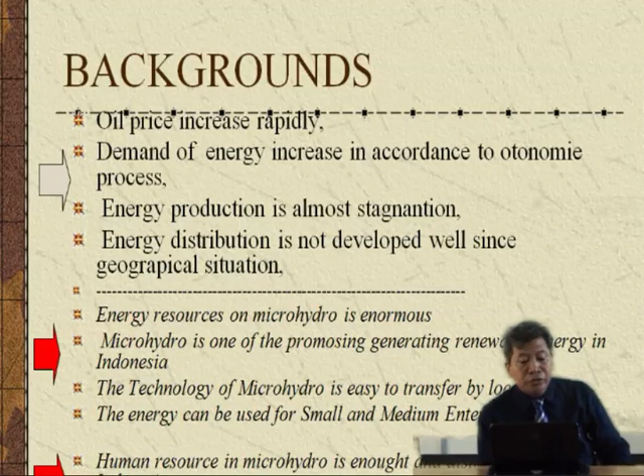On the other hand, we have an enormous microhydro potential in Indonesia's resources. If you go from here to the north, east, or west direction, you will find rivers, and you can also develop microhydro from that river. Or in Java, for example, you have a huge amount of irrigation channels, and you can just go through the irrigation channel - you can find a drop every 1 kilometer.

Technically, engineering-wise, you can solve it, you can build it. But the problem is not only how to build, but how to handle, how to manage after construction to get power and use the power for economic activity. This is the big problem right now. You learn about microhydro not only from the engineering side, but also from the social side, economical side, and environmental side.

So microhydro is one way of promoting generating renewable energy in Indonesia. Other lands understand this well. Germany understands that Indonesia has a huge amount of hydropower potential. Japan knows well about that. Australia knows well about that. They want to come to Indonesia to work with us to develop microhydro or hydropower plants.

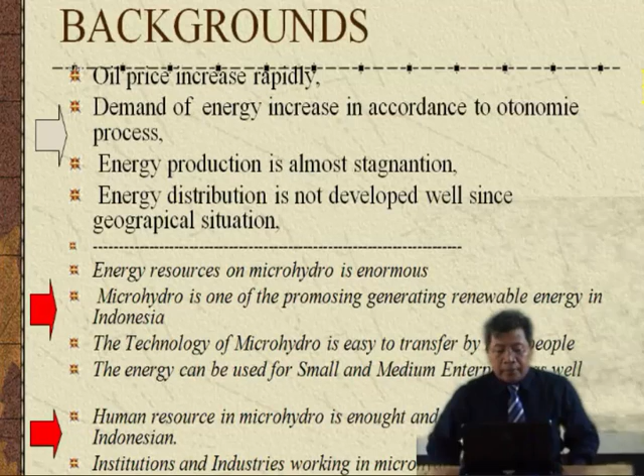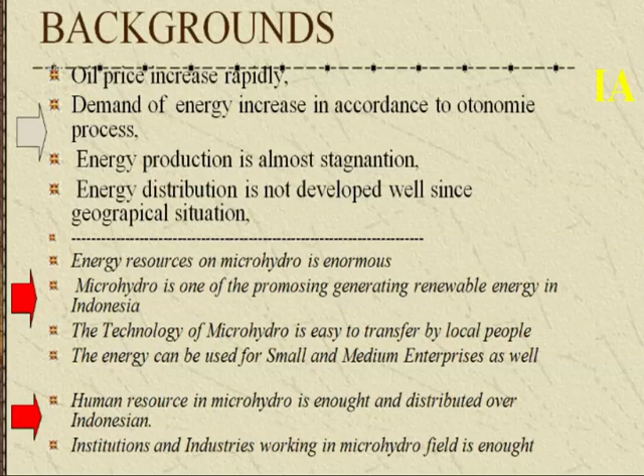Human resources in microhydro in Indonesia are enough and distributed over Indonesia. People who understand microhydro are already distributed, but you still have to learn. You are the new generation; the older ones will retire, and you are the new generation. That means microhydro can be distributed very fast to all islands in Indonesia.

Let's say in Irian Jaya in Papua, we already have more than 15 people who understand microhydro, our alumni. In Kupang, East Nusa Tenggara, we also have some people. In West Nusa Tenggara in Lombok, there are 10 people who understand about microhydro and small and medium enterprises too. In Java, a lot of people understand and have already built that. Also in Sumatra, Sulawesi, and Kalimantan.

But the problem is not how to build, I have said to you, but how to maintain, how to arrange, how to make microhydro automatically produce energy, and the energy will be used for activities.

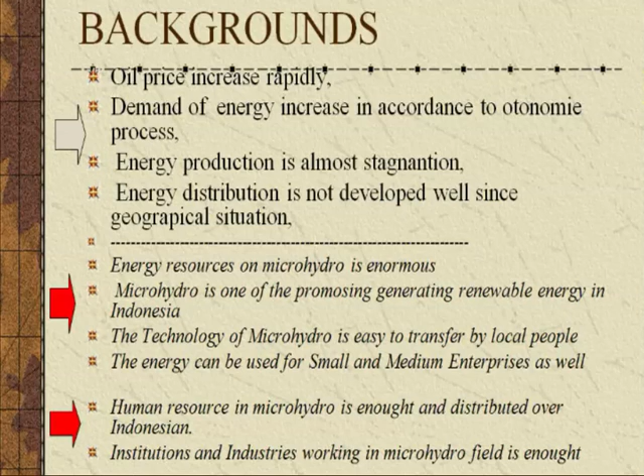Institutions and industries working in the microhydro field are enough also. Every district already has an institution which takes care of the development of microhydro, and we also have industry. Let's say in Medan we have 2-3 people who have industry for producing microhydro turbines, control units, and so on.

But compared to the Indonesian geography, even though the human resources are already distributed all over the islands, we need much more people who can build and maintain the microhydro.

Good. The concept of microhydro development is something like that. Microhydro or hydropower plants produce energy for electric supply, of course. But for what then? For village enterprise, first. So if you want to build microhydro, it's not just about building it and producing energy, and saying using the energy is not your business. No way. You have to make sure that the activity after microhydro construction is your work too.

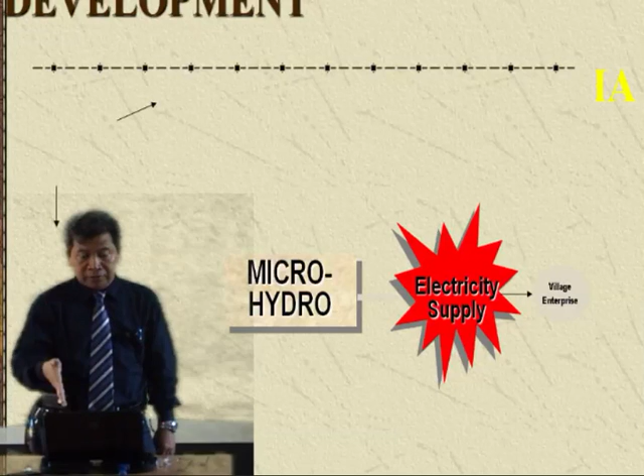Your work as a system engineering student is not only how to produce electricity, but how to use it until you produce something to sell and get money for income for the microhydro, because microhydro also needs maintenance, needs money for people who work on it, and needs money to build a new microhydro.

So the system is like a spiral: one microhydro in the beginning, in 2 years you'll have 2 microhydro, another 2 years you'll have 3, 4 microhydro and so on. So then you will have much more microhydro. This will happen if your microhydro produces electricity and the electricity is used for the village enterprise.

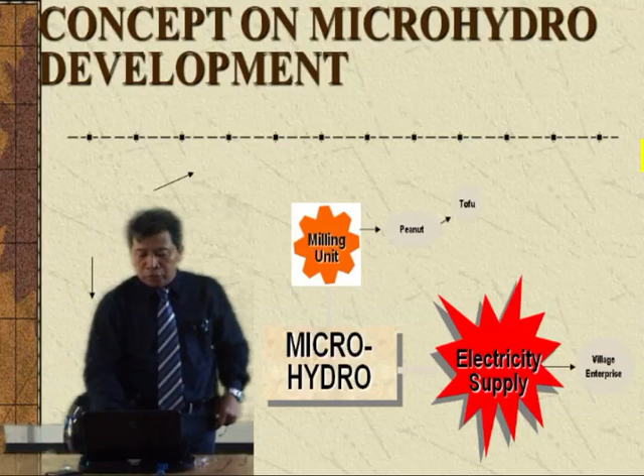I think I have already talked to you about that. You can use the energy for several purposes, like a milling unit for chocolate, rice, peanut, tofu, tempeh, and so on. Or for veterinary use, or other agriculture production, or you can use microhydro for a drying unit, for ginger, for coffee, for every purpose.

Another thing is for water supply. So if you have a water problem, drinking water, you can use the irrigation channel for microhydro, and couple the microhydro turbine with a pump, pumping water from a deep well to get water supply. Or you can also pump irrigation water from the low head to the high head.

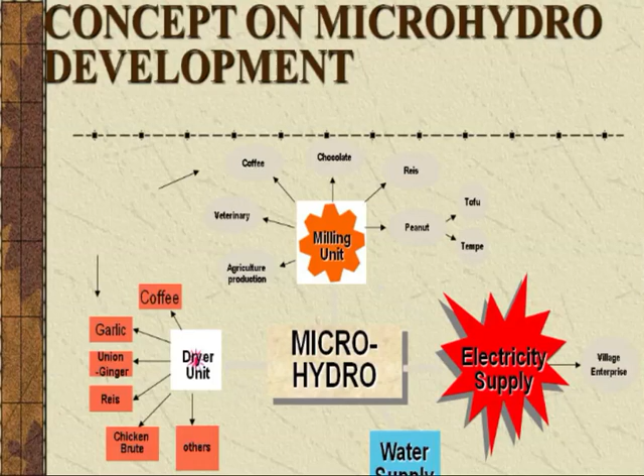Why is water supply important? Because with a pump, your microhydro energy is very effective, since you can use it 24 hours for pumping. But if you use it for lighting, milling units, and so on, it's okay too, but it's not effective because you have to turn it off, turn it on, repeatedly. The energy you're producing will sometimes be used, sometimes not used.

Water supply, irrigation pump can be used also, or garment village, all the activities. And what is very important to explain is about waste management here.

Our concept is actually a one loop concept. We have energy concentration, microhydro to produce energy. You should not only learn about small microhydro, but for starting you can learn that. Then the other concentration is small and medium enterprise around here. So you can also learn about small and medium enterprise.

And the other topic, concentration, is waste management there. The waste management is also for you because the whole small and medium enterprise produces waste, solid waste and wastewater. Then you have to learn how to handle the waste. So our system is actually already compact. We have energy, we have small enterprise, and we have also technology for waste management.

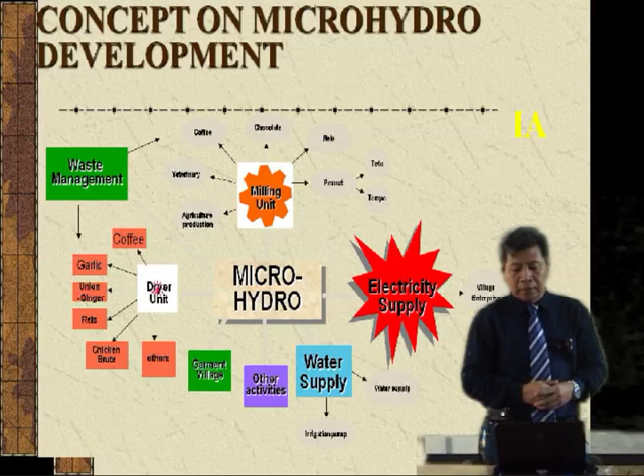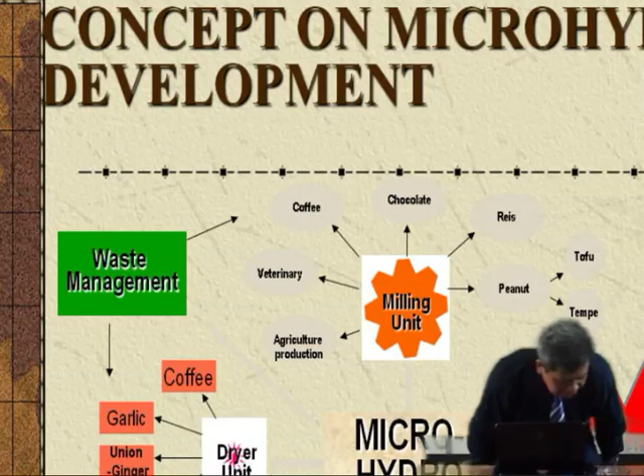But you have to learn by yourself also marketing and accounting, because you need that. It is a pity if you just build something and you cannot sell.

It's not systemic thinking. If you build something, you have to sell. Don't say let somebody else sell it. No, maybe somebody else doesn't want to sell your product. Or minimum, you have to find people who can sell your product and you get money from them. You should not sell by yourself, but you have a system for selling the energy. Okay?

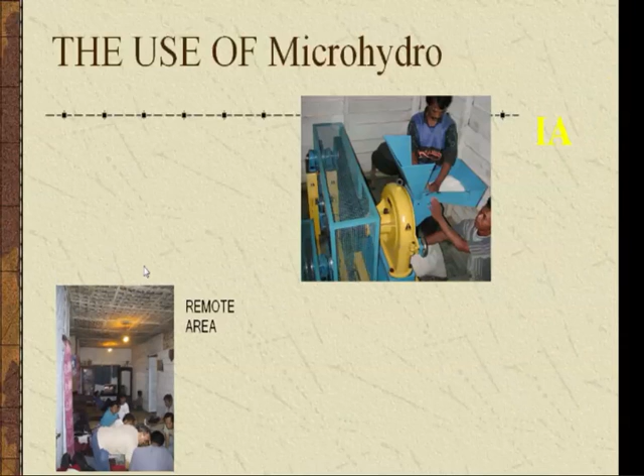The use of microhydro electric energy can be of several types. For example, here in a very remote area for lighting, or this is the microhydro, and this is the turbine, coupled directly with the rice mill, then you can produce a rice mill.

The renewable energy development based on community is for increasing the living standard. This is the concept. One thing you have to learn also is how to realize the concept, not only the concept itself. The concept is nice, but how to realize the concept is one very important thing.

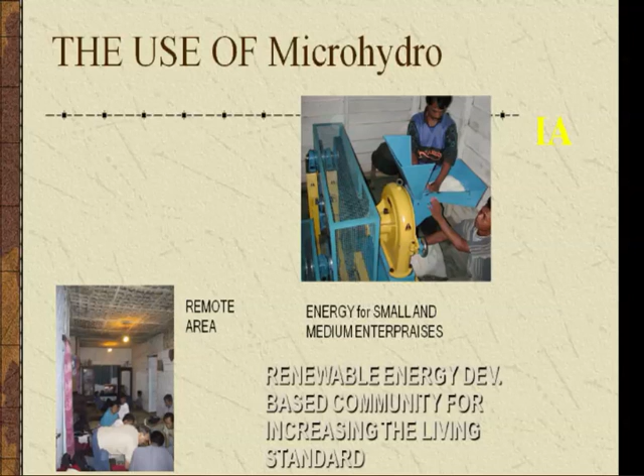This is systemic thinking, a combination between the thinking world and the living world, how to plan and how to implement. You should not be satisfied with information that you already have, that you have already learned. It is not systemic thinking. You have to be satisfied if you have already learned and already done. I have learned, I have done, and I have knowledge. Learning, you get information.

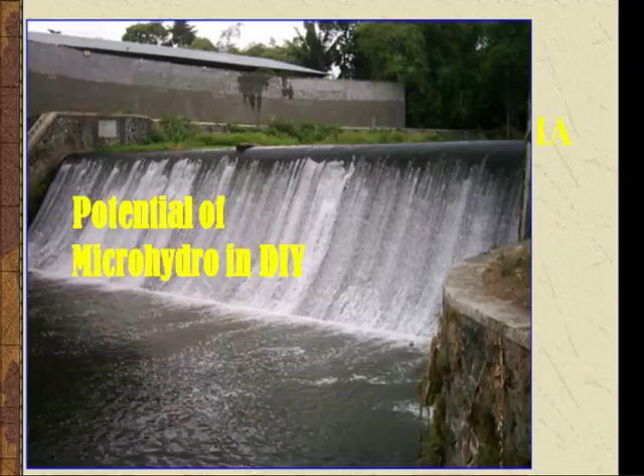Good, the other potential, for example, we have a lot of weir. This is a weir. Weir in Indonesia, in Bahasa Indonesia, is bendung. And dam is bendungan. Weir is bendung, something like that. You can see here, you still have water.

3 cubic meters per second, for example, a very wide river. You even have to think about the environment also, like you have to fulfill here with a fish way, so the fish can also swim up and down. So even with a weir, you still have ecosystem, fish ecosystem, with the fish way.

But this is also potential microhydro that you can produce. For example, here 5 meters or 4 meters, with 3 cubic meters per second. Then 5 times 3 is 15, you can produce about 75 kilowatts.

We are not talking about megawatts. Megawatt is a huge amount, a huge scale of microhydro, and for the student it's just a dream. But under 100 kilowatts, for the student, it is not a dream. This is reality. You can produce, you can work with it.

Don't always think about the big thing, 2 mega, 3 mega, 6 megawatts, but you cannot do that. You can start with 10 kilowatts, 5 kilowatts, but you can do it by yourself, and the people can understand. And then by the time you increase your ability from 10 kilowatts to 20 kilowatts, I can handle 20 kilowatts, I can build, I can also handle, I can use the energy. It's nice, for example, something like that.

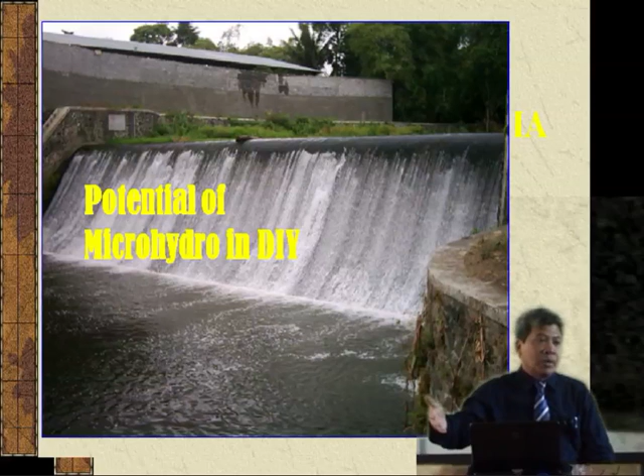So we have to start from small things. Of course, you can also, as a member of a group, develop 1 megawatt, no problem. But if you want to develop by yourself, you can say, okay, I can make 10 kilowatts. It is my business, I can do it by myself.

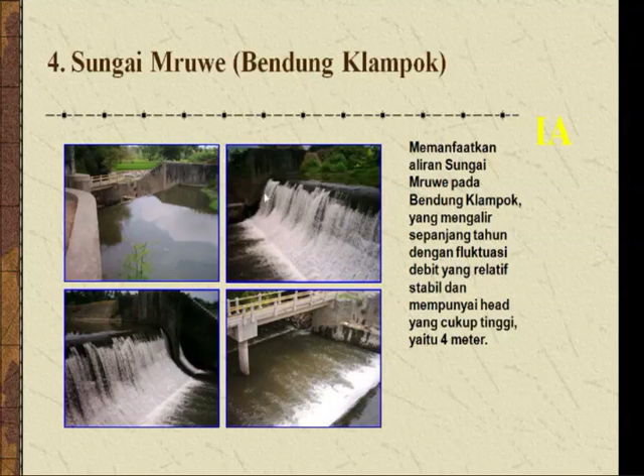This water is very clear, and you can use just an open intake and let the water flow to the intake, and then you can get energy, producing energy.

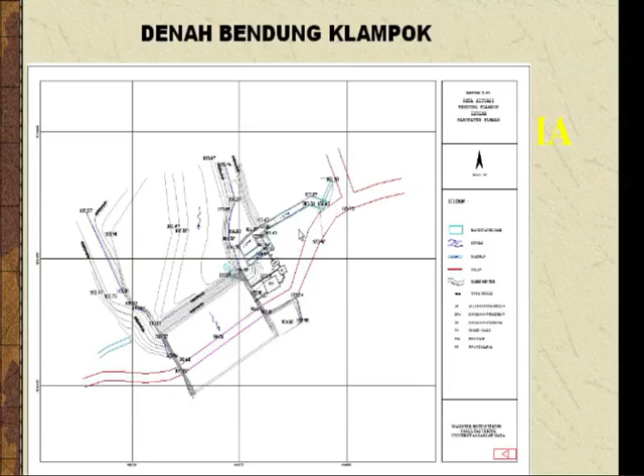But yeah, this is the river flowing down here, and here the weir. Look at this, we can open here and make it microhydro here, and the river can be closed again back here, and you have produced microhydro there, like this.

You can see here, you can also make here much bigger intakes, and you let the water flow here, and you give it back here. In here, you can build microhydro. So like this here, this is a...

sediment trap channel, and then here the turbine, and then here you have a channel going to the turbine. The turbine will be running because the head here and here is different.

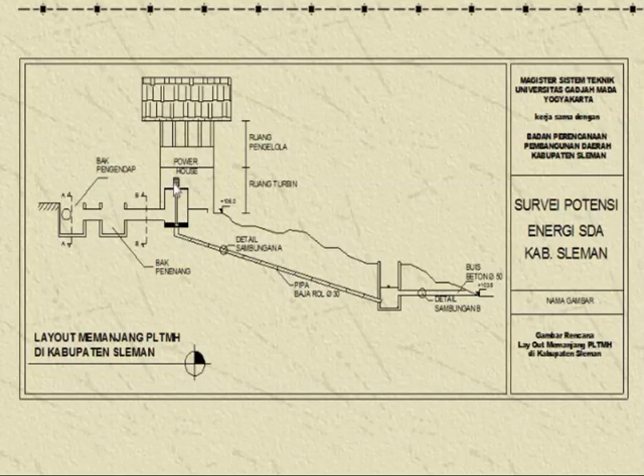The head difference can be, for example, 10 meters or 6 meters. So the turbine here will run because of the head, and then here you have a generator. The generator will also run, and then you have electricity. It's very simple. The water comes down here because of the water head, the turbine propeller is running, or was run, and then the generator produces electricity. This is a simple concept of microhydro.

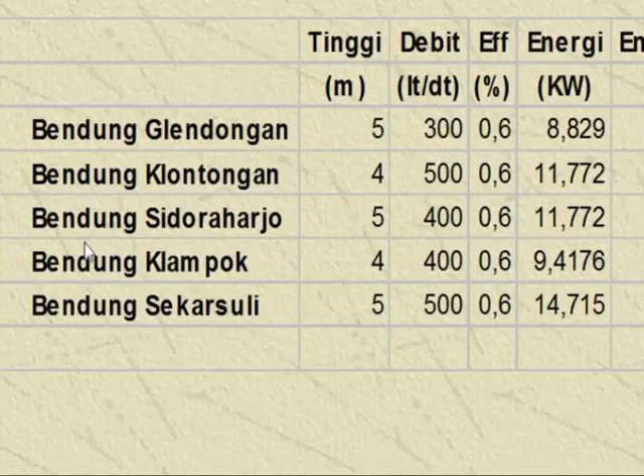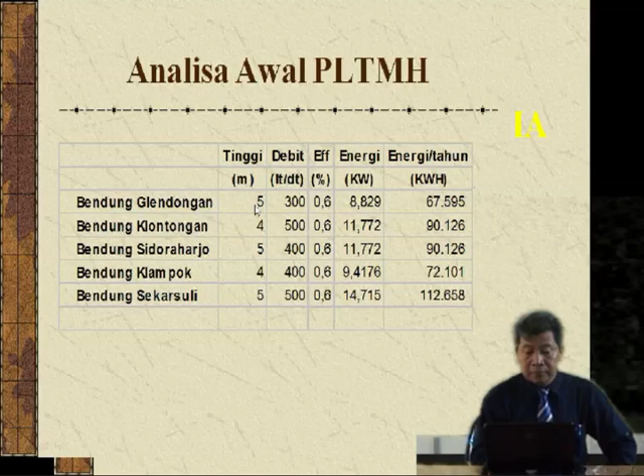That way, this is also easy to develop. And here in several places we have a lot of potential, like for example here in Glendongan, they had a 5 meter head. The discharge is 300 liters per second, a small discharge.

Effective efficiency we have only 0.6. We can increase it to 0.75, but normally 0.6 is already good. And we have energy of 8 kilowatts only.

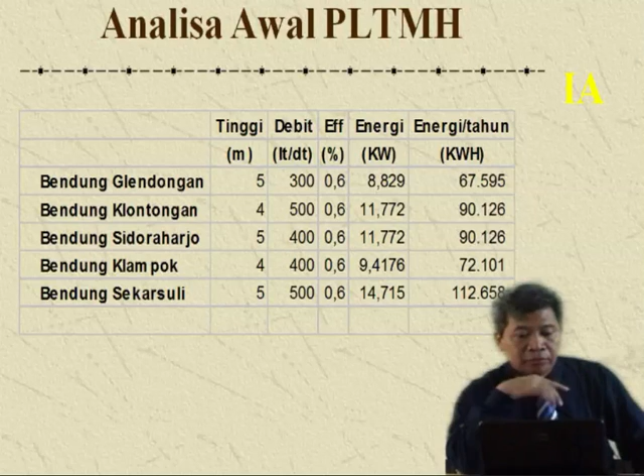So you can use it for small and medium enterprises with each kilowatt. And here, Sekarsuli, you have 14 kilowatts. Of course, you can also produce 1 megawatt, but maybe that's not your scale. 10 kilowatts, 15 kilowatts is your scale.

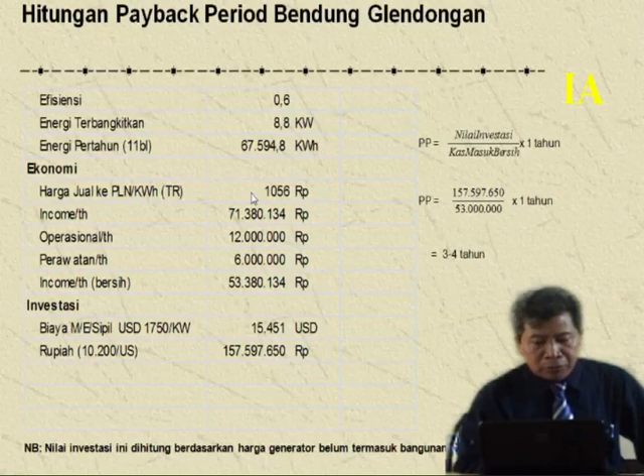Good, if we want to calculate, this is not too difficult. We have 0.6 efficiency. We have 8.8 kilowatts of energy producing, and 11 months, because 1 month is for overhaul and maintenance, you have 67.5 kilowatt hours... 1000 kilowatt hours, and we have now 1056 rupiahs per kilowatt hour. Income per year you have 71 million rupiahs already.

For operational, you need one person to operate, about 1 million times 12, where you have to spend 12 million. And then for maintenance, you have about 6 million. You have income per year of 53 million rupiahs, if you sell that energy to PLN.

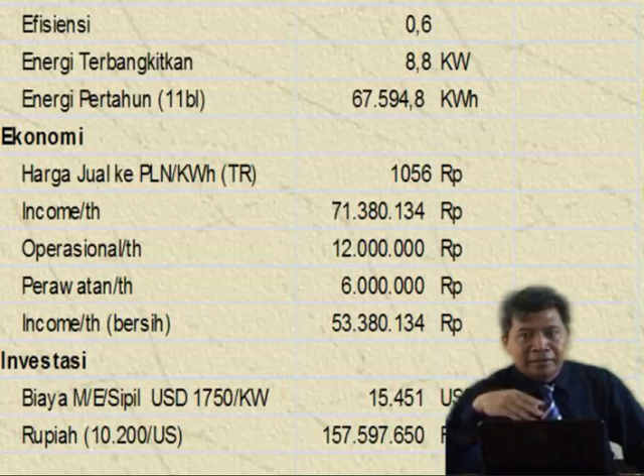Of course, the problem is how to sell it. PLN would like to have a good quality of energy. What is good quality? Good quality is the frequency 50 Hz, for example, with 220 volt, for example. Regular, that means PLN doesn't want to have energy for 1 hour and then no production the other hours. So we have to convince them that our energy production is stable, good quality, then we can sell to PLN.

Selling to PLN, if you can sell to PLN, is the best. You should not think of anything else, you just sell to PLN and you get money. And how about the money? The money is yours. If the community around the PLTMH is also included in the project, you have to share with the community.

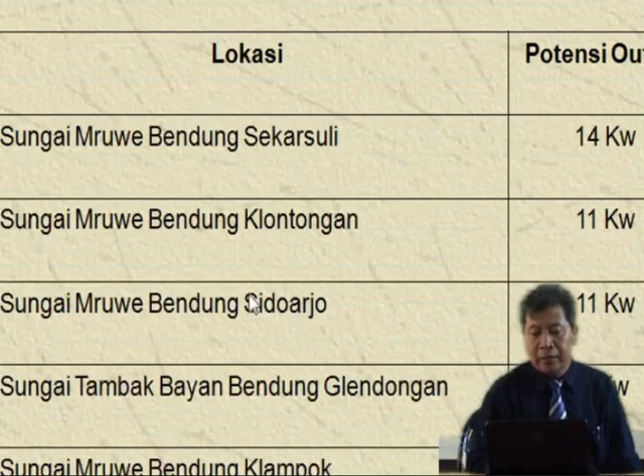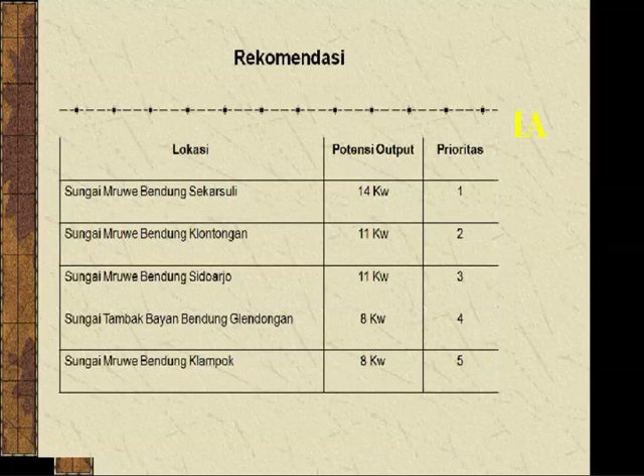For example, the 11 kilowatt is already near to the community. The community is ready to share. The community needs the electricity, maybe even at 8 kilowatts. This is the priority, very high, for example 15 or even 100 kilowatts, but if the community doesn't need that...

and nobody cares about that, it's far away from the community, it's too dangerous and so on, this is not the priority. Priority will be recommended if engineering is possible, social is also possible, economic is also possible, and environment is possible.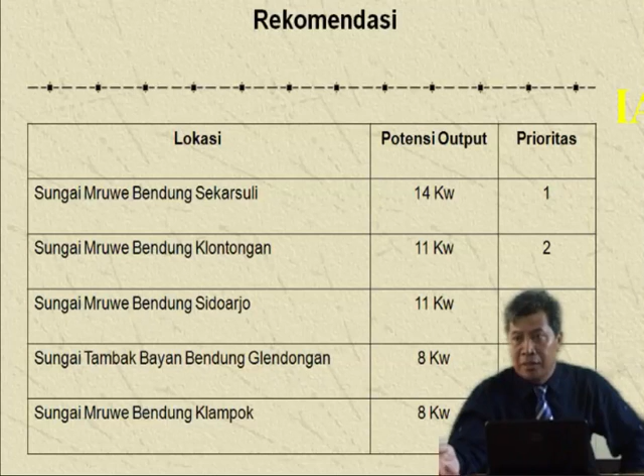In engineering, it must be possible, social, adaptable - people understand and can do that. Economic, accountable and feasible, and environmentally sustainable. Not that the water comes only this year - next year we don't know whether the water flows or not.

I can show you another potential in another place, in Semawung. Some of you may have already seen this potential. This is a huge amount of potential in Semawung. This is the irrigation channel - you see, this without water, this with water. The head difference is 10 meters. You have to visit there. I will give you a task to visit so you understand. Huge amount of water. Semawung is in Kulon Progo, not far from here, only 1 hour using motorcycle, then you can find that.

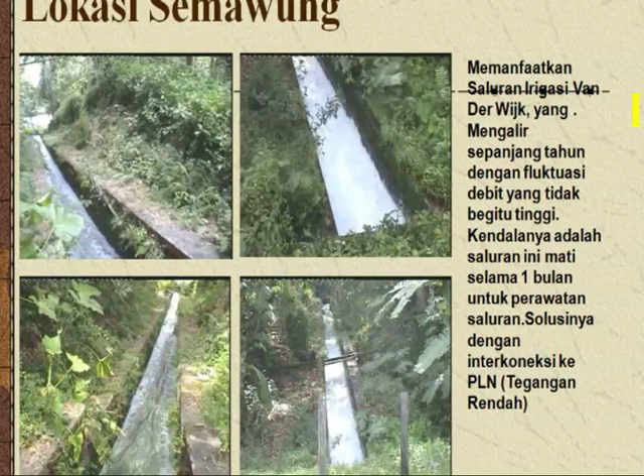About 10 meters head, and the discharge about 5-6 cubic meters per second. A huge amount of potential. Of course, it's not up to 1 megawatt.

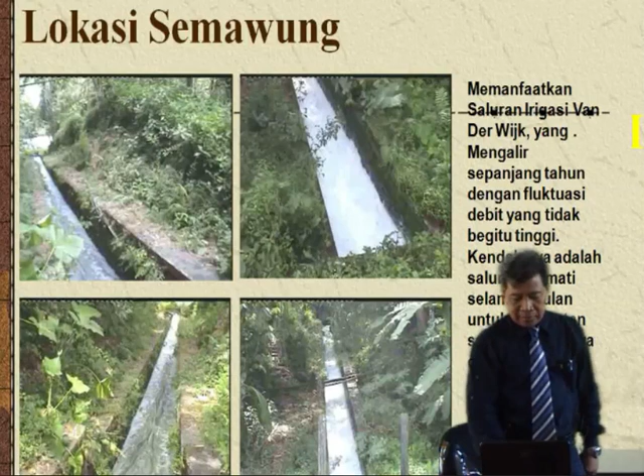Another location in Kedungrong. Look, these two potentials, Kedungrong 1 and the other Kedungrong, are huge amounts. The discharge is about 3 cubic meters per second, the head about 5 meters. You can imagine a huge amount.

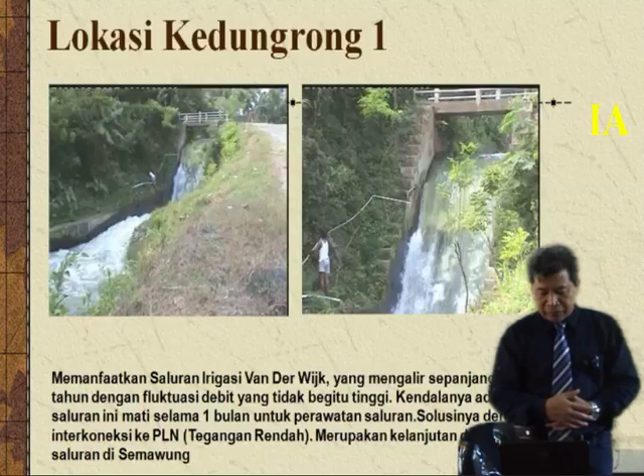Let's say we try to see - the head is about 6 meters, discharge about 3 cubic meters per second or 3,000 liters per second. The energy is about 90 kilowatts.

And every year we have only calculated 11 months, so we have about 689,000 kilowatt hours, say 1,000 kilowatt hours. If you want to sell to PLN at 1,056 rupiah per kilowatt hour, your income per year is 727 million rupiah per year.

And this irrigation channel, this potential, has already been unused for 50 years. That means you've lost 727 million rupiah times 50 years already. You can imagine.

For operation, you can use one person, plus maintenance of 6 million. Then you have about 700 million rupiah per year. In the village, that's a huge amount of money. Maybe in New York it's not too much, but in a small village you can imagine. If you can sell it and give the money to the people to develop their economic activity, you can imagine it's a very huge amount.

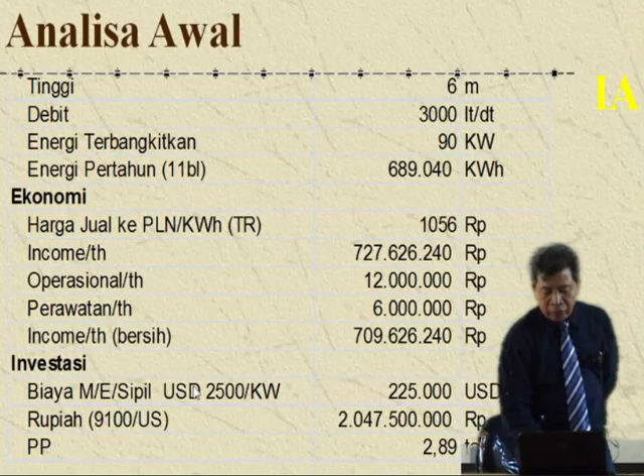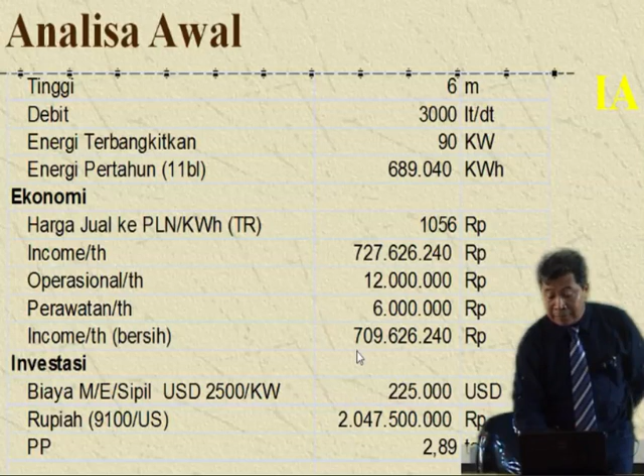And if now 1 US dollar is 9,100 rupiah, you have to have 2 billion rupiah. So if you spend 2 billion rupiah, and you already have 709 million rupiah, your money will come back in 2.89 years, or 3 years. In 3 years your money comes back, and the other 22 years it's your money, or the money of the district region.

Of course, from the calculation it's easy, but how to implement is another question. You cannot say, 'oh, we can invite people from outside, from Germany or Japan or another country to come here to develop that.' If you do that, it means forever you cannot. You have to say, we have to do it by ourselves, with our hands, because we have a kind of responsibility to deliver our knowledge to the young generation. The knowledge can be delivered if we can do it. If we cannot do it, we cannot deliver it.

Information is not knowledge. Knowledge is information, time, experience, and attitude. If you have the attitude to deliver knowledge to the new generation, that means you have knowledge. If you have no attitude to deliver your knowledge, that means you have no knowledge, only information.

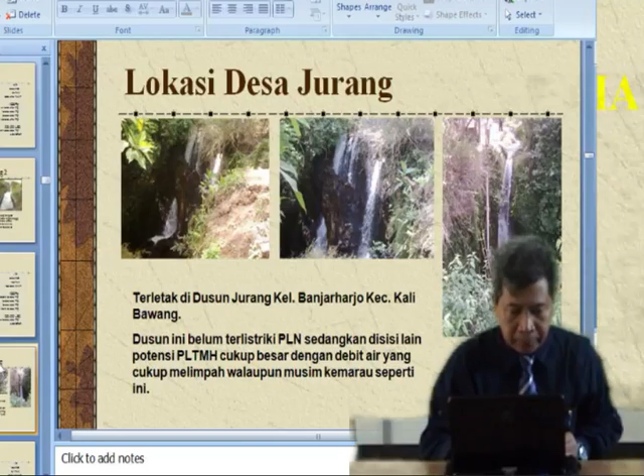So with this, in 2.8 years, only 3 years, you can pay back the money from the bank or from other resources. If the money is from government, you cannot just say 'oh, the money is from government, we build and finish.' No, you have to think about it, even if the money is from government, spending on the people - you have all these things. In 3 years we have to collect the money back. Same with our capital, the money can be used for development again.

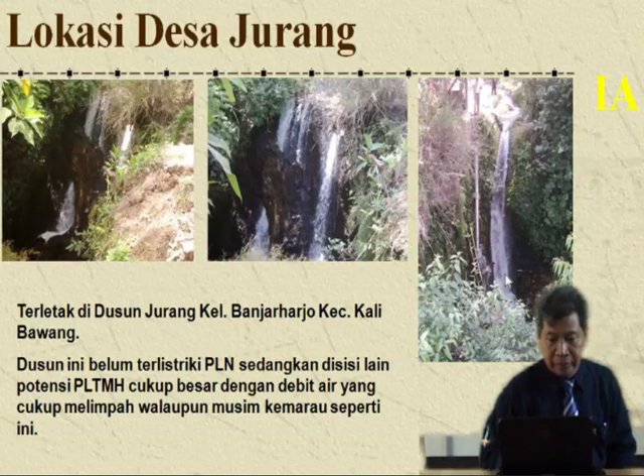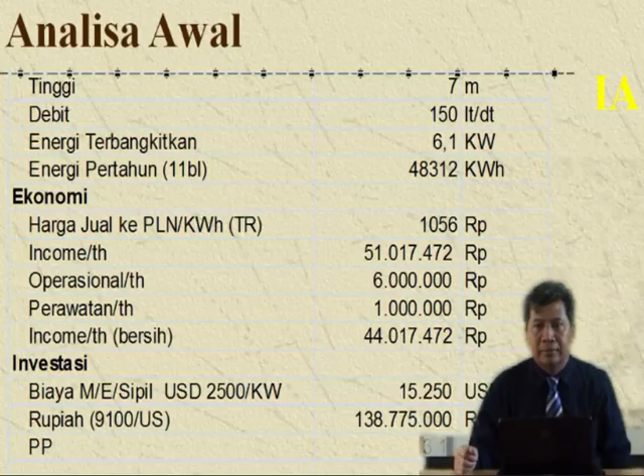If the oil price always increases, that means microhydro energy becomes better and better. How about in a very arid area, for example here in Gunung Kidul?

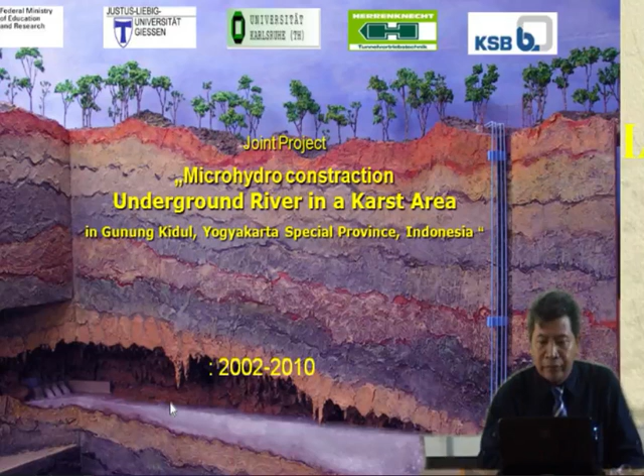In Gunung Kidul we also have potential underground rivers. Have you ever seen an underground river? Not yet? You have to see it. I will give you a task to go down, give you a sign, and you will see what kind it is. This project was created by the district government, German Karlsruhe University, and other fields, BATAN, and also Gajah Mada University and MST, I'm involved there. This project is called Microhydro Construction in Underground River in a Karst Area, Gunung Kidul, Yogyakarta Special Region, Indonesia.

This is the underground river, about 100 meters under the earth's surface. This is the earth surface where you cannot find water. Every rainfall comes down here and flows down. Here you see stalactites and stalagmites - this is stalactite, and down here stalagmite, and underground here you have water. The water collects here and flows down.

And here we build a barrage, or we stop the water there. The water in here is a river, pipe river like that, underground. In a very small area we build a barrage, and then the water cannot flow down because of the barrage. The water will increase, and we have a head difference. The head difference is about 15 meters. More than 15 we don't want, because the structure of the karst area is very porous. If you put the head difference more than 15, we don't know whether the karst area can hold the water or not.

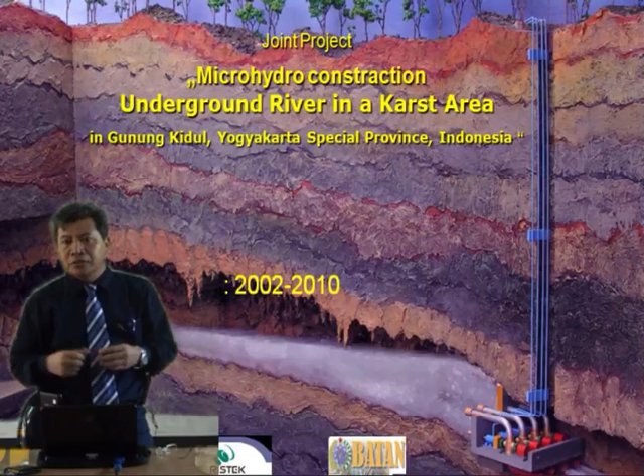So this is the thing that you understand well - between theory and practice is quite different. You have to understand that. What I want from you is that you not only stay in the theoretical thing. Theoretical things are easy - you can learn in one night and understand. But practical, you have to go down to the real situation and work on it. Then you have information from books or from lectures, and you have also the opportunity to work on them. So you combine theory, information, and practical experience, and then you have knowledge.

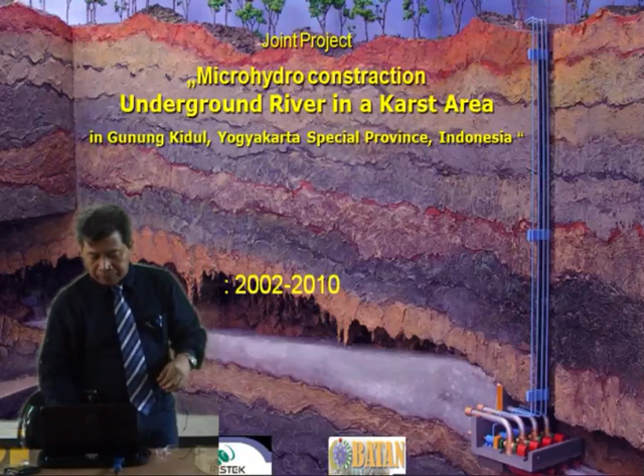So this is the Bribin, Purwosari, Kabupaten Gunung Kidul. Head is 15 meters. Discharge is 1,000 to 2,000 liters per second, or 1 to 2 cubic meters per second. If you calculate, we have only 350 kilowatt. And if we can pump the water 80 liters per second, with a height of 250 meters, from the river underground, you pump 100 meter plus 100 meter plus 50 meters, and from that you can distribute to the people who need water.

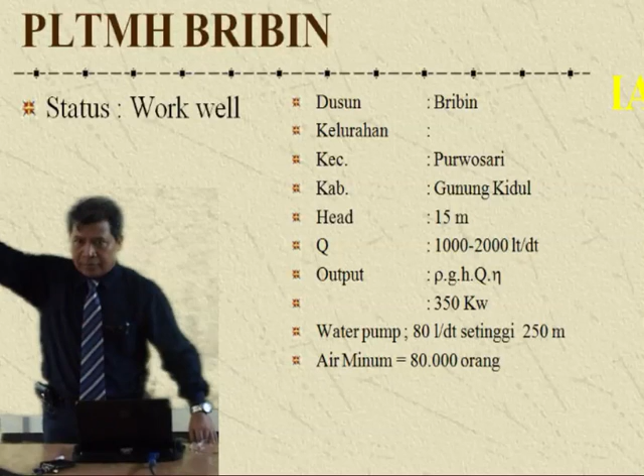If you do that with a class, you can imagine how many pahala (reward) you will get. You will get a lot of pahala, and you will fly to heaven with us together. But not now, because we have to do something.

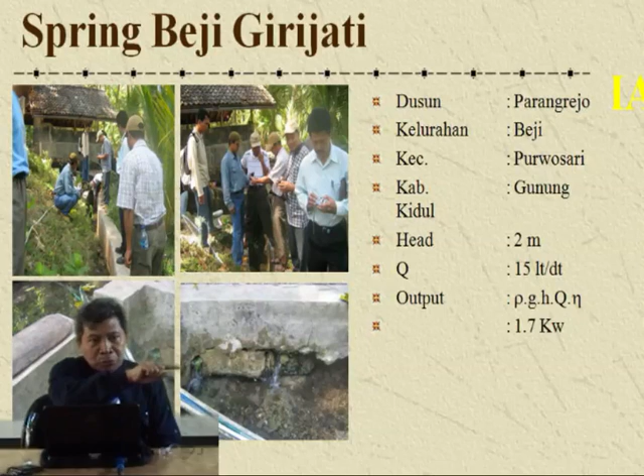Even if you have only a very small spring, if you go to the hilly area, sometimes you find a very small spring there. You can trace the small spring, go down and down. You can measure with a theodolite or just a water pass, and then you can find the head difference. You can make a pipe there and build a micro plant. Maybe you can get only 1 kilowatt, but no problem. 1 kilowatt is already enough for about 20 bulbs, 20 bulbs with 50 watts each, which you can divide into 5 small bulbs, enough for about 20 households. So don't worry about that.

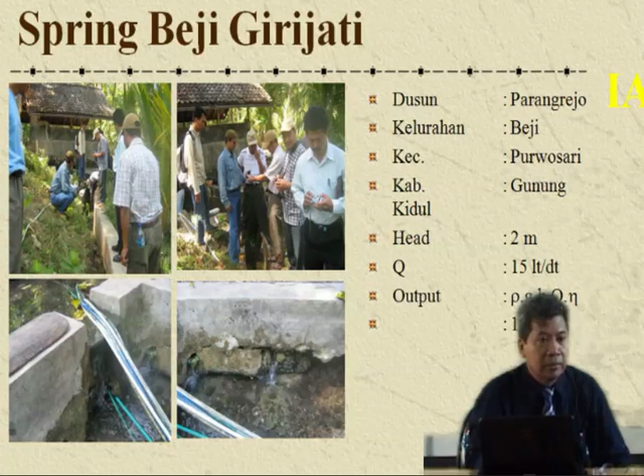Look at this here. Head only 2 meters, 15 liters per second, you have 1.7 kilowatt here. So here 10 meters head, this is a very small amount of water, but the head is 10 meters, only 10 liters per second, you have 1.8 kilowatt, and 1.8 is usable 24 hours.

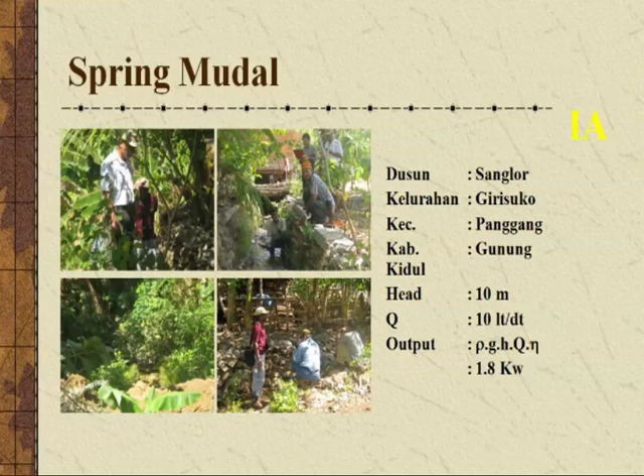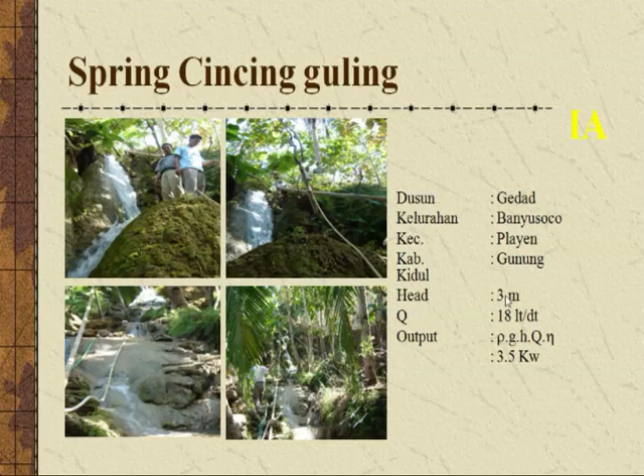Here 3 meters, we have 3.5 kilowatt. Not 3, 30 - I think it's 30. 3.5 kilowatt. This is also 30, that was 30, and this is also 30, then you have also 3.

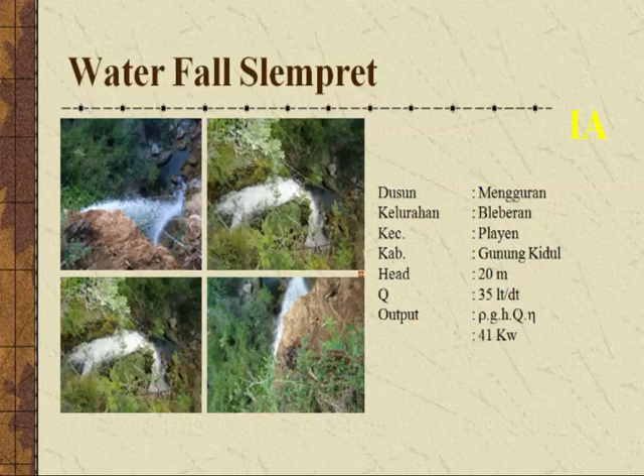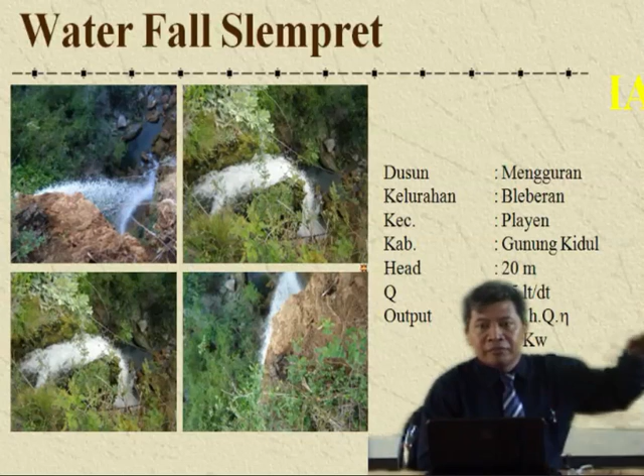So here we have a waterfall in Bleberan, Playen, Gunung Kidul. We have 20 meters, but the discharge is only 35 liters per second, just a very small creek. But the head is 20 meters. This is nice because it is cheaper than if you have 1 cubic meter discharge but only 1-2 meter water head - you need a big turbine. But if you have a very high head difference and very small discharge, you only need, for example, only a 20 centimeter turbine like here, but they can produce the same energy as a very big one. So the higher the difference, the better for microhydro, the cheaper. The less head difference, the more expensive.

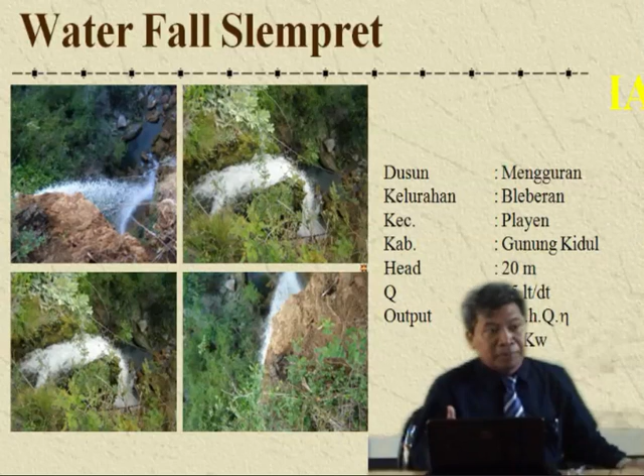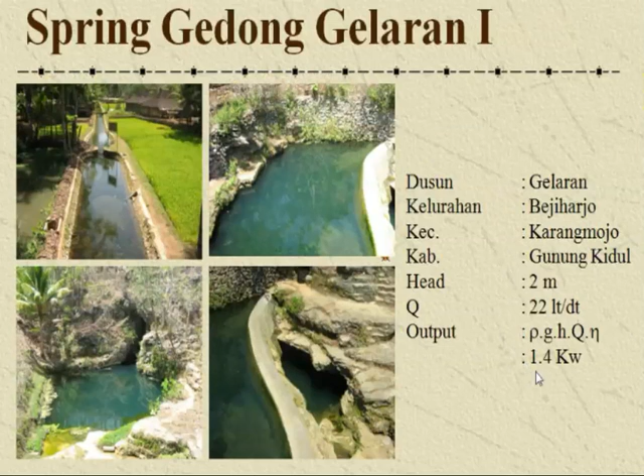We already implemented this. I will show you the implementation of microhydro. Maybe my lecture will finish in 10 minutes. For example, a project in Minggir, Sleman DI, discharge intake is 0.85 cubic meters per second, or 850 liters per second, and the head is only 2 meters. The output we have is 10 kilowatt.

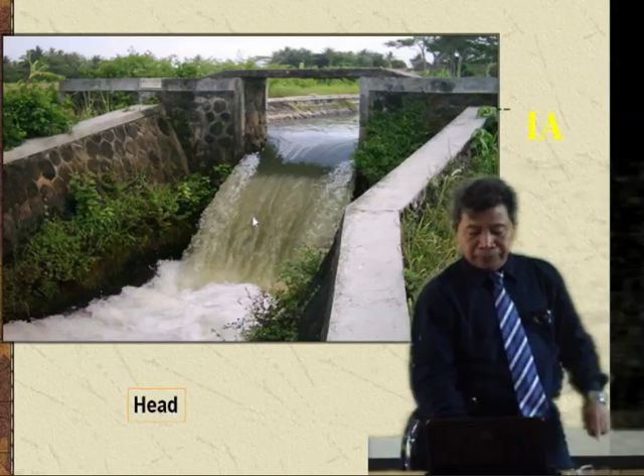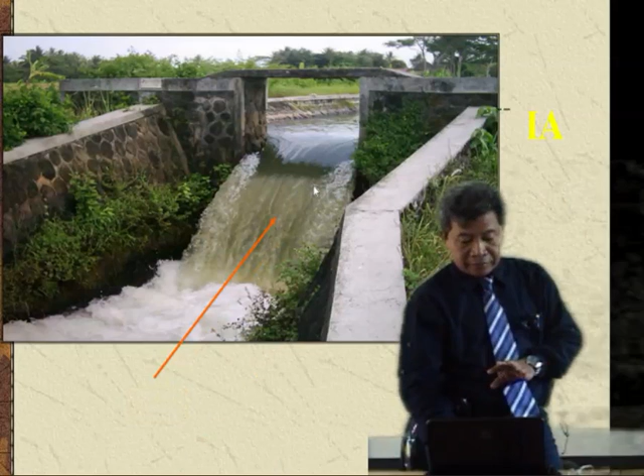Look at this here - this is the irrigation channel in Minggir. So we have a place here for building the microhydro. The powerhouse is here, and this is the channel going down. This is upstream, this is downstream. It's already about 40 years this irrigation channel has not been used for electric energy. The head difference here is about 2 meters. So then we try to build a powerhouse there.

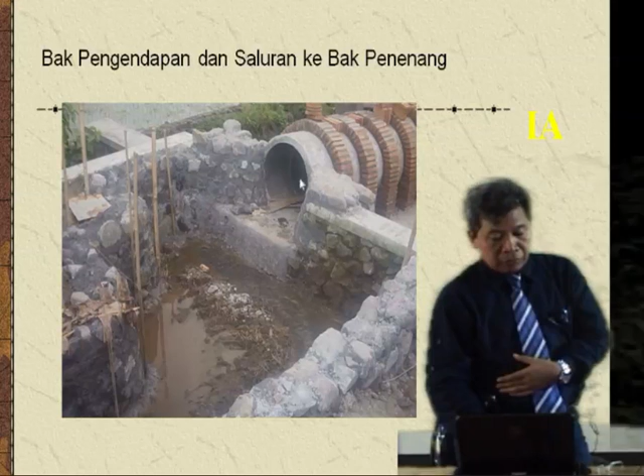Here is part of the powerhouse, rumah Pembangkit. This is the irrigation channel, this is the release chamber, release channel. Again, here we can say this is the sediment trap area before we go to the channel. Here the channel is not a penstock but a channel, flowing to the turbine.

This is the irrigation here. We make the powerhouse here - this is the channel going to the powerhouse, and the turbine will be here, and the water flows again to the irrigation channel. So the water should not flow outside from the irrigation channel. You have to bring the water back to the irrigation channel, otherwise the farmers will be angry with you, because they need water. You just take the energy, not the water. The volume of the water should be the same before and after the microhydro. So here is the chamber for the turbine, and this is the release water channel going to the irrigation channel.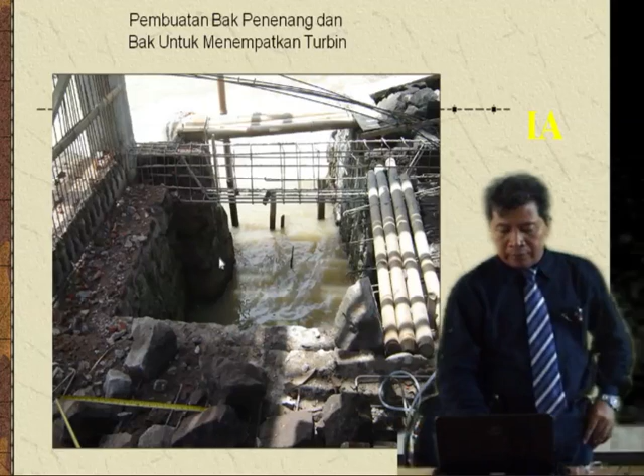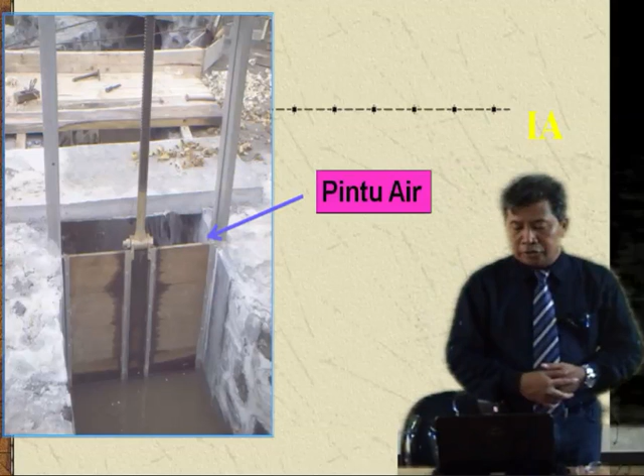Here is the intake from the irrigation channel to the sediment trap chamber, going to the forebay in there. This is the gate. You can arrange how much water, how many cubic meters you want to release. This is water from the irrigation channel going down to the sediment trap, then coming to the forebay channel.

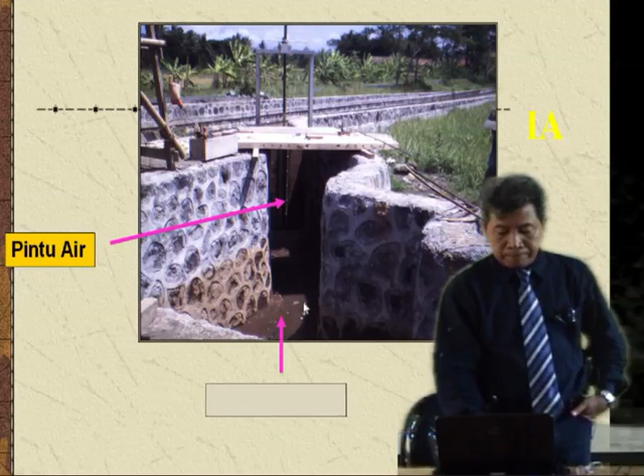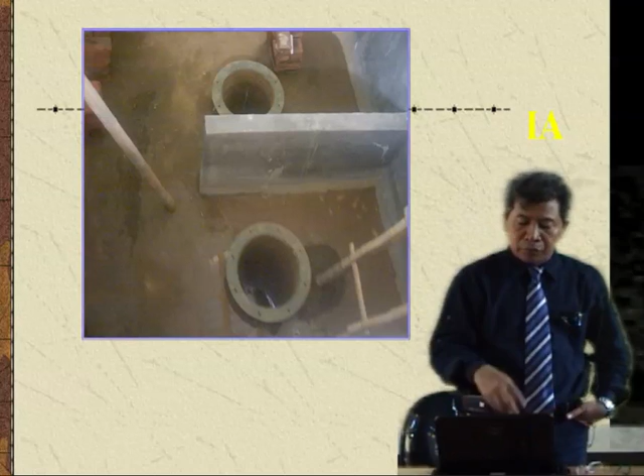Gate again. This is the channel coming down there. It's not banked out, but this is the forebay. This is the turbine holes. You will pull the turbine on the hole there, so the water flows to the hole and comes down to the irrigation channel.

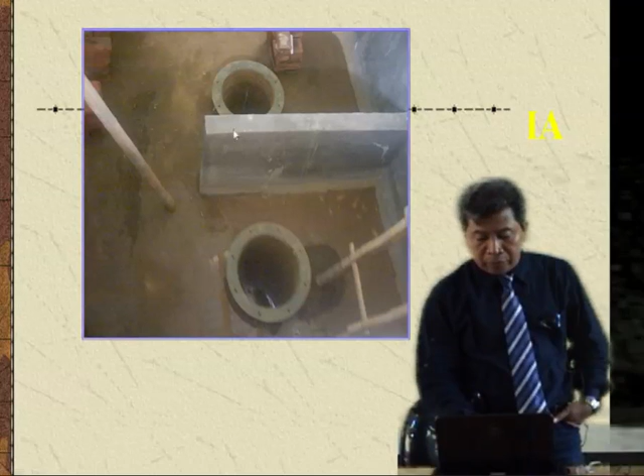So you use an open flume turbine here. The open flume will run two open flume turbines, and we couple the energy into one generator. The generator is one, but the turbines are two, so the generator will be run by two turbines. This is best good, so we minimize the generator.

This is not the turbine but the turbine hole. The turbine will be plugged onto the holes, so the turbine will run. The water flows down, coming out, flowing out to the irrigation channel.

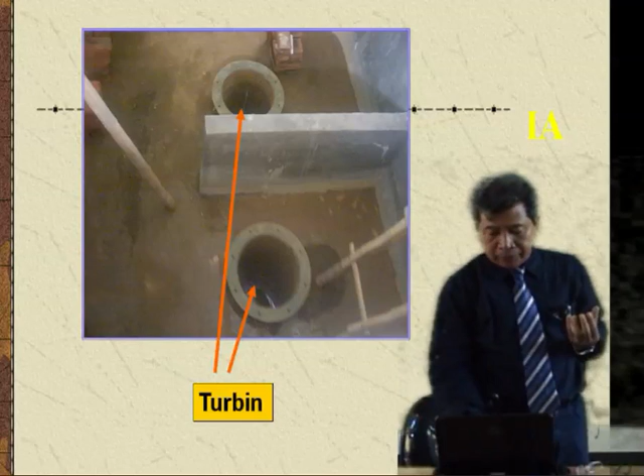Look at this. Here is the intake coming here. You see the channel coming here, and this is the floor for everything. You can go inside to the panel here, and in this place is the turbine. You can see here, this is a turbine chamber, and the water flows there.

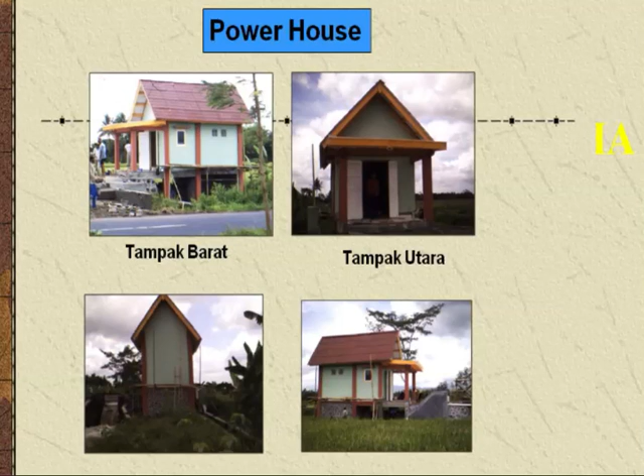Again, here is the powerhouse, it's very nice. Look from several sides. It's a nice powerhouse, you can use it for an apartment maybe if you want.

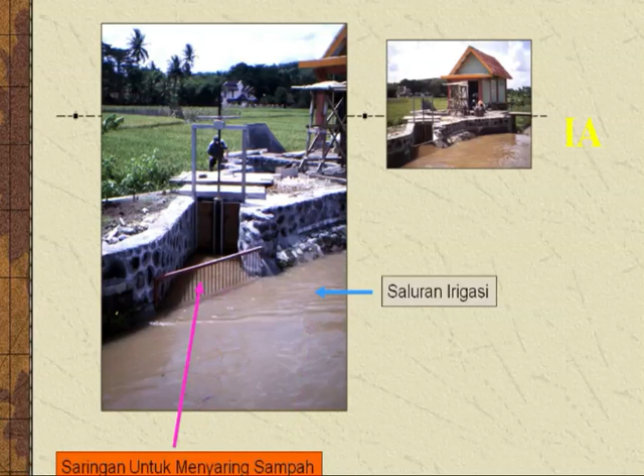We build also a gate here, so we can stop the water. The water only flows. This is number 3, 4. This is the...

So here we can take the grid and pull it down again. Press right. This is the gate.

Here we also have a small spillway, in order to always have the same level of water. The water level should be stable, because if your water level changes, your frequency and voltage will change too, and PLN doesn't want to buy that kind of electricity. So you have to have a spillway here to make sure your water level is always maintained. More than that, close it down. The spillway goes down and comes back again to the front.

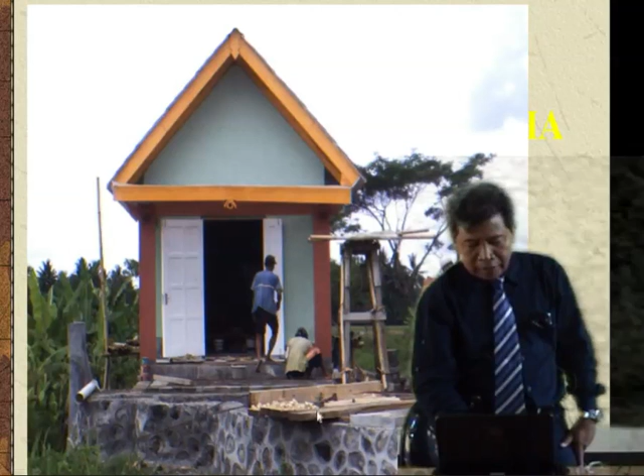We try to invite people around there to work with us. This is a kind of community development together, working here.

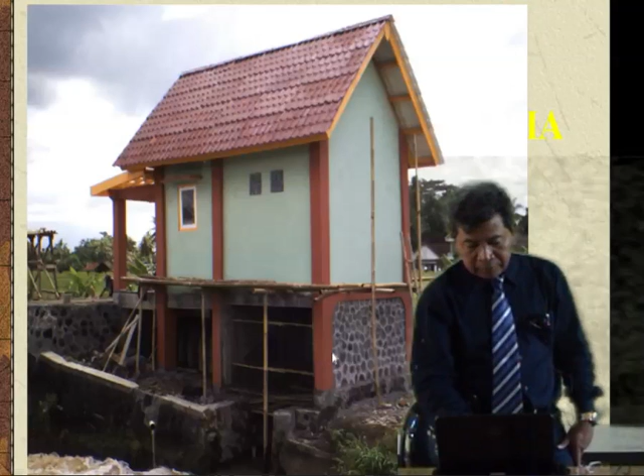Look, it's very nice. The water still flows here. It's not used, we can close this gate here. Close the gate, the water flows and goes there.

Almost finished, almost finished again and again. Voltage, electric output 10 kilowatts with voltage 220 volts.

So that was our first project that we made in Bagian, and it's running. But the problem is we have already tried 2 years to sell the electricity, but it's not finished yet until now. Sometimes this microhydro is broken because the turbine is in the water and starts to corrode, so the propeller cannot move. Every year we have to pull it out and repair it, and put it down again, but nobody uses it. The problem is the utilization after construction, not the building itself. To build it is ready, but to use it is another question.